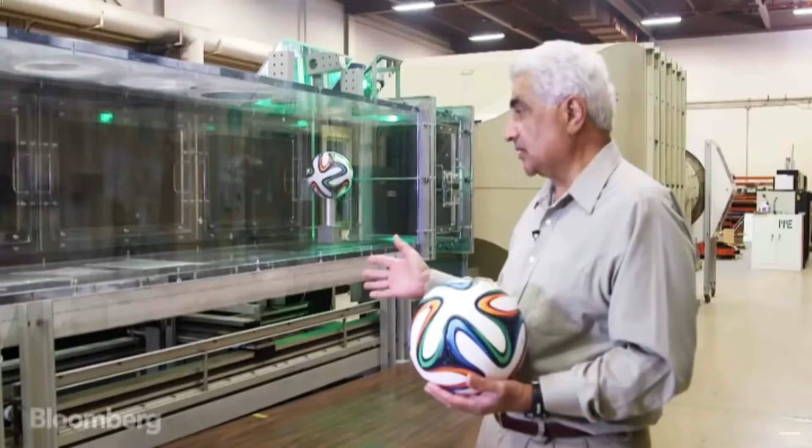Aerodynamics basically is the study of fluid flow around objects. NASA is not in the business of designing soccer balls or any balls for that matter, or testing them. What we do use sports balls here for, especially in our lab, is for educational purposes. We found that it's very easy to get young kids interested in our field by showing something they can relate to. What we have here is a wind tunnel, which is basically a chamber through which air flows.

When it comes to soccer balls, what we're looking at is the flight of the ball through the air. There's a very thin film or layer that forms near the ball surface, and it's the behavior of that layer, which we call a boundary layer, which is critical to the performance of the ball.

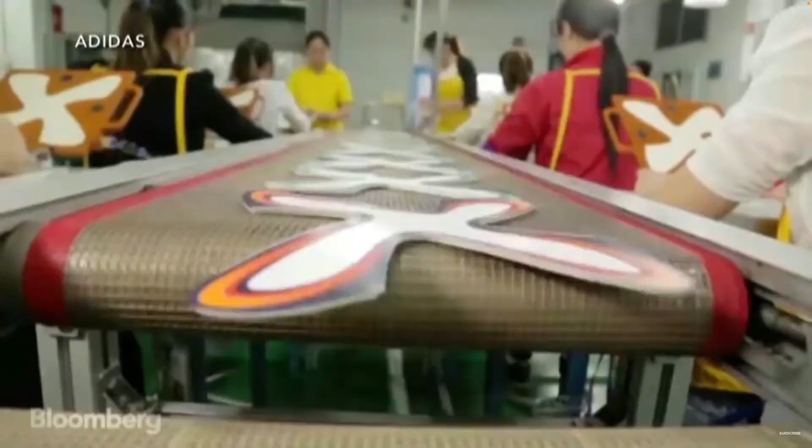As far as the aerodynamics go, it's the structure of the outside, the material, the roughness. That's what determines the aerodynamics of the ball.

Knuckling is when the ball flies erratically through the air, or it may change directions as it's flying through the air. What's been done to this ball is that by using these panels with fingers on them, the seam length has been increased compared to the ball from 2010.

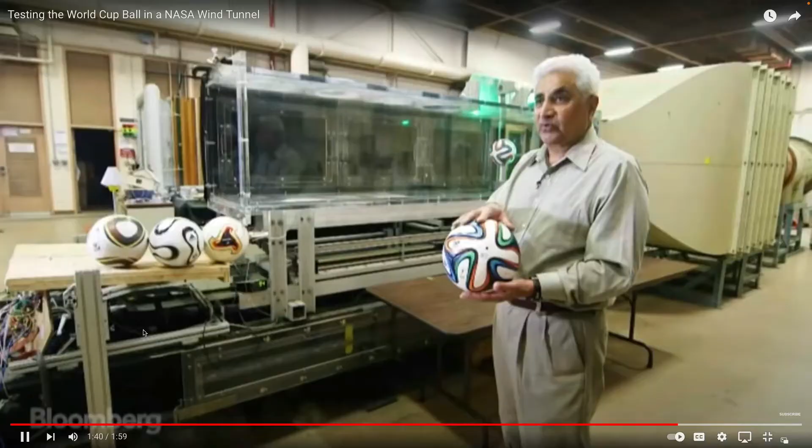What we're looking at with the smoke patterns is where that smoke leaves the ball, at what point along the surface. When that position of separation changes suddenly, that's the speed at which the ball will knuckle the most. I think the basic message for the players is that you'll see less of this knuckling.

So I guess, yeah, we're talking about dimensional analysis, and it's a technique that we can use that helps us guide experiments that we might want to run. And so these three things that we looked at, we can go back since we have some time.

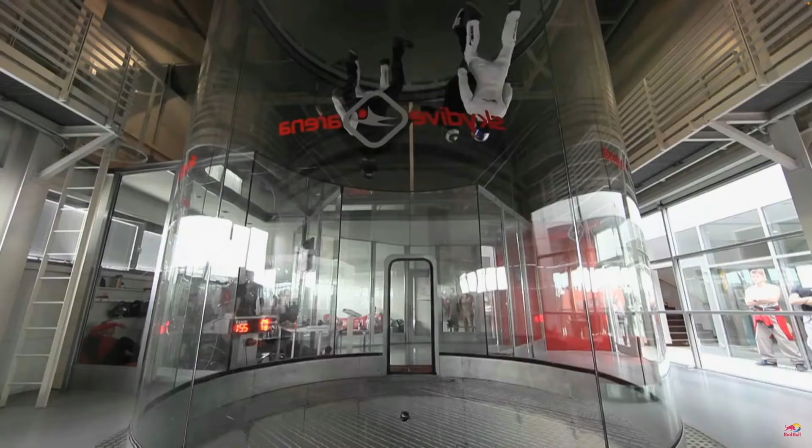We got the Red Bull acrobatics team flying vertically in the vertical wind tunnel. I guess just as I presume they could use it for training people to go do skydiving. I imagine that's what perhaps it's for, but obviously in this case it's for recreation as well. And you get the idea. You can almost do synchronized swimming, right? It's almost synchronized air tunnel work in terms of being able to move around these.

Quite elegant in some respects, but that's just using one of the tools we might talk about in terms of what we're interested in, and that is a wind tunnel, which is just a way to get fluid, air in this particular case, moving at some reasonable velocity.

The second one was the car, looking at getting a car running within a wind tunnel. Wind tunnels are big enough that you can get a full-size prototype in there, so you don't have to worry about it being a model and having to scale based on that. But you can use the same principles we advanced last time.

There are two important numbers that we have to look at. One is the Reynolds number, to make sure it's kinematically the right flow regime. And at that given Reynolds number, for a car, that would be for the air velocity going at 100 miles an hour, or whatever it is you want to judge the performance at.

Then using measurements of lift and drag on the weight of the car, and horizontal translation, which I presume is this little doodad here measuring lateral translation and horizontal force, you can scale that to look at the magnitudes of lift and drag. In fact, you wouldn't need to scale it in this case, because you're using a one-to-one model with the same velocities for the flow regimes.

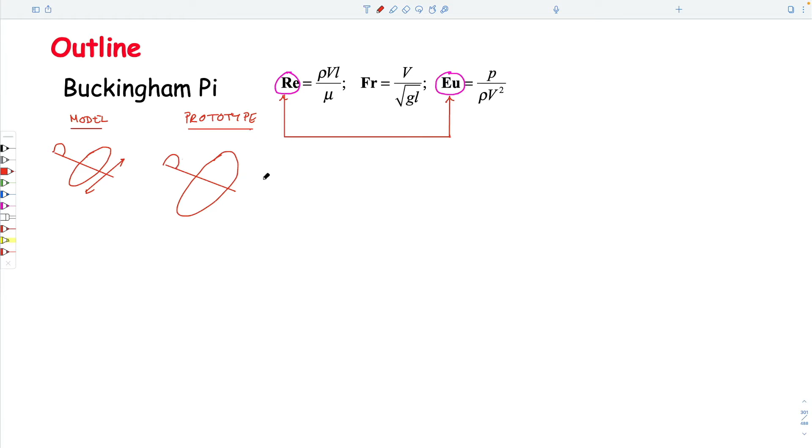But they should be similar in proportions. So we could write the length of the model and the length of the prototype of the wingspan, the width of the prototype and the width of the wing airfoil, since that would be an important dimension for us, of the model. We could perhaps have a pressure on the model and the pressure on the prototype, and I don't know what else we want to consider.

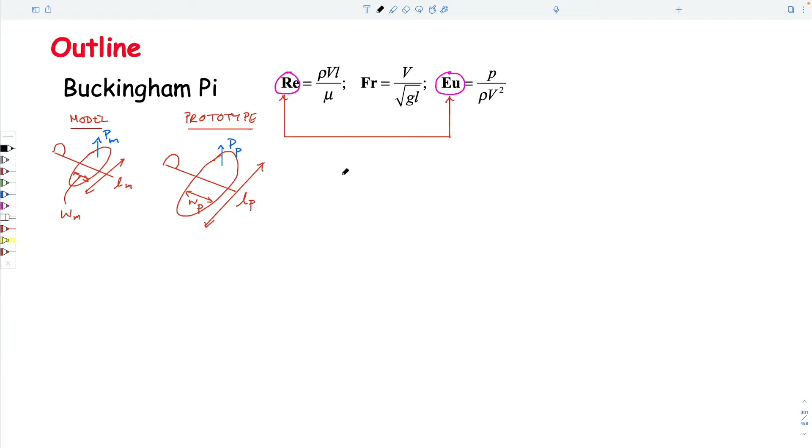We said there are three requirements for similitude. Let's take this as equal to 1 meter, and let's take this as equal to 10 meters. So the first one was geometric similitude.

We said that the ratio of the lengths should be constant, so Lm over Lp equals a constant for all the components. In this case, Lm over Wm equals L of the prototype over the width of the prototype - the ratios. So if this is 1 meter and this is 0.2 meters, then this would be equal to 2 meters. It just has to look physically the same, geometrically a scale model of what you're dealing with.

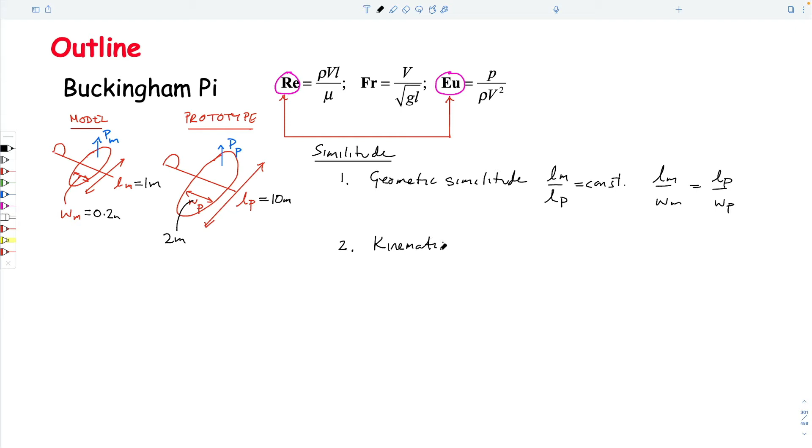The second one was kinematic similitude. We explained that the flow regime around it, if you took a snapshot, should look the same for the model and the prototype. So this separation - imagine this is a soccer ball, and this is the separation on the backside that comes out of the cross-sectional area of the soccer ball. We want to make sure that the flow regime is the same.

We make sure the flow regime is the same by making sure the Reynolds numbers are the same, so the Reynolds number for the model equals the Reynolds number for the prototype. The Reynolds number is inertia to viscous forces. We didn't define it here, but we have a velocity in the model - what am I going to choose for velocity in the model? 100 meters a second. And choose a velocity in the prototype.

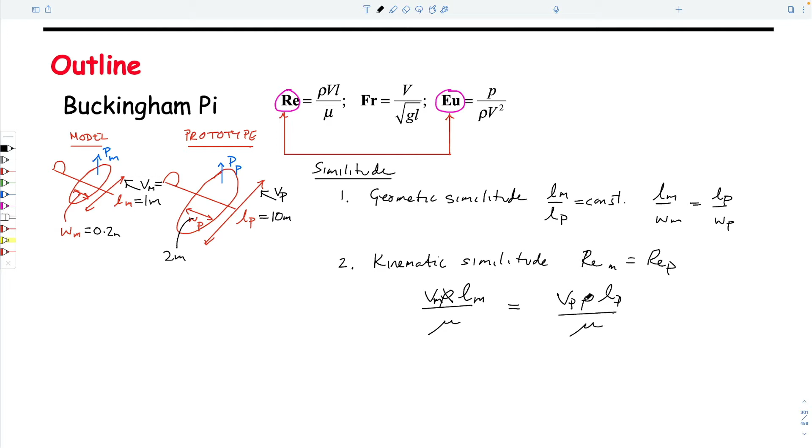So velocity times density times length divided by viscosity, for the model, equals the velocity of the prototype, the density of the fluid in the prototype, the length of the prototype divided by the viscosity of the prototype. If you're using a wind tunnel for both, then by definition the densities of the fluids will be the same, and the viscosities of the fluids will be the same.

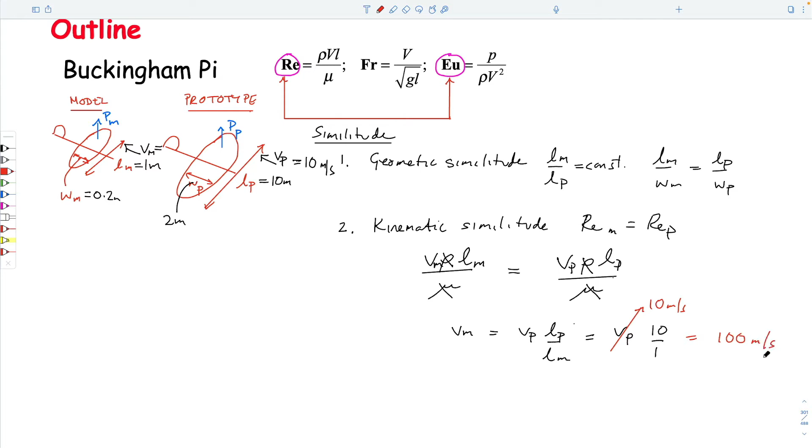So from this, the velocity in the model is going to equal the velocity in the full-scale prototype times the ratio of the lengths - so this would be 10 over 1. If we have a velocity of the prototype of 10 meters a second... let me use some different colors... then the velocity in the model has to be 100 meters a second to maintain the same flow regime.

The third one was dynamic similitude, which is that the Euler number for the model and the Euler number for the prototype have to be the same. The Euler number is a pressure ratio - the ratio of pressure to inertial forces: pressure over rho v squared equals pressure over rho v squared. This is the pressure in the model, this is the velocity in the model, and prototype and prototype.

If again we choose the same fluid flowing past it for the two, then what we want out of this is the pressure in the prototype. The pressure in the prototype is equal to the pressure in the model multiplied by velocity of the prototype squared over the velocity of the model squared.

This is what we'd measure. And the velocity of the prototype, what did we say? To maintain kinematic similitude, we said VP was 10 meters per second. So this is 10 squared over 100 squared. The pressure in the prototype is going to equal what we measure in the model test multiplied by 10 to the minus 2, which gives a pressure.

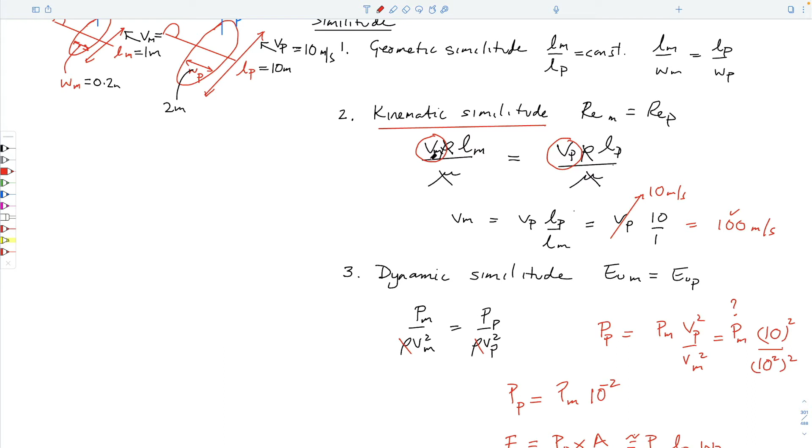If the Reynolds numbers are the same, then the velocity we're traveling at in our plane is replicated in the wind tunnel by choosing the model velocity to be equivalent, matching the Reynolds numbers. If we use that Reynolds number in the lab, we use it to convert and get the ratio of the pressures in the system. So if we measure on the model, we wouldn't measure pressure, we'd measure a force, typically an uplift force, and then use that to calculate what the uplift force would be on the full scale thing. That's really all it is.

So what we're doing is having a Reynolds number, measuring an Euler number, and getting some relationship that matches them. We know that if we use the correct Reynolds number, we can calculate the appropriate pressure Euler number that represents the pressure. So if we do both the model and the prototype at the same Reynolds number, we're guaranteed that the Euler number would be equivalent, but the relative dimensions of the system would be different. That's really all we're attempting to do. So that's kind of what we're doing in this week 9 material.

There are 3 requirements we have to match. Scale models should geometrically look similar to the system by being scaled down in every dimension, or if it's 1-to-1 scale, it doesn't matter. If we make sure the flow regime around it is the same in both model and prototype, we can define the appropriate velocity to do the model experiment at. If we do the model experiment at that velocity, we can measure the pressure in the model, and then convert that into the real pressure on the prototype. So that's where we're going with this.

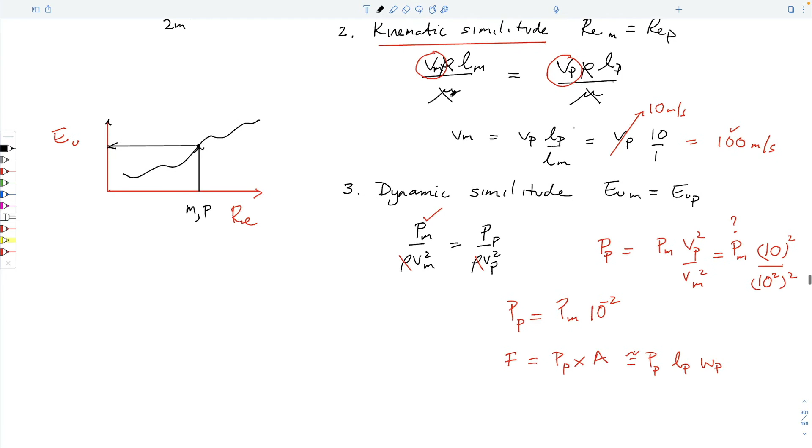So we made this supposition that we can link these two important variables. There's a third one — we said this is for free surface flows, so we're not so interested in that for what we'll do. These are for pipe flows that we'll deal with.

So what we could do is go back and look at some things we've already talked about — flows around objects, and we'll come back to this diagram, but looking a little different. We'd like to walk before we can run, so we could try looking at flows on structures that are perhaps more useful or more germane to us.

So we talked about pipe flow, and about changes in pressure that drive flow. We've talked about lengths, which I'll call L. We'll talk about the velocity we get out of this, which we can call V or V bar. What else? We can define the geometry of this, which is a diameter. And I suppose we could define some other terms: the density of the fluid, the viscosity of the fluid. And we've already defined the diameter — these are the parameters.

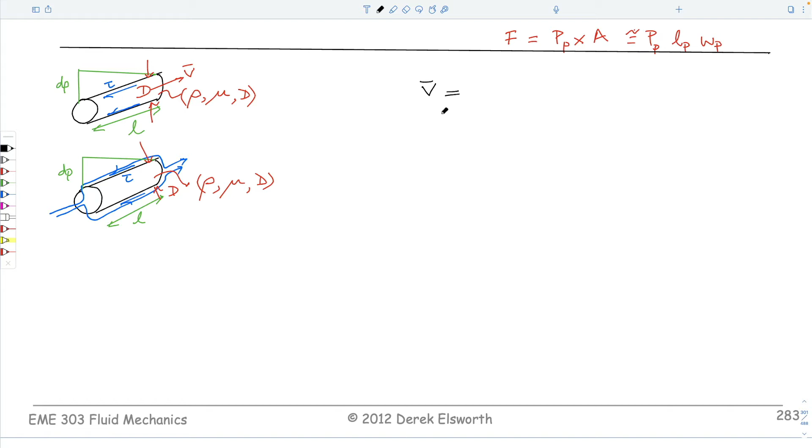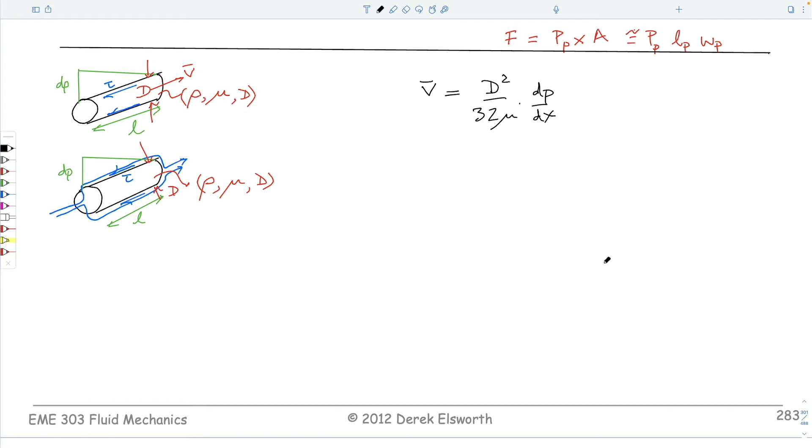The reason for looking at this is that if you remember from 8.3, our last period together on Friday, we came up with an expression which was this. I'll go back to it in a second. So write that, try to remember it. We'll come back to it, and I'll just switch back to 8.3.

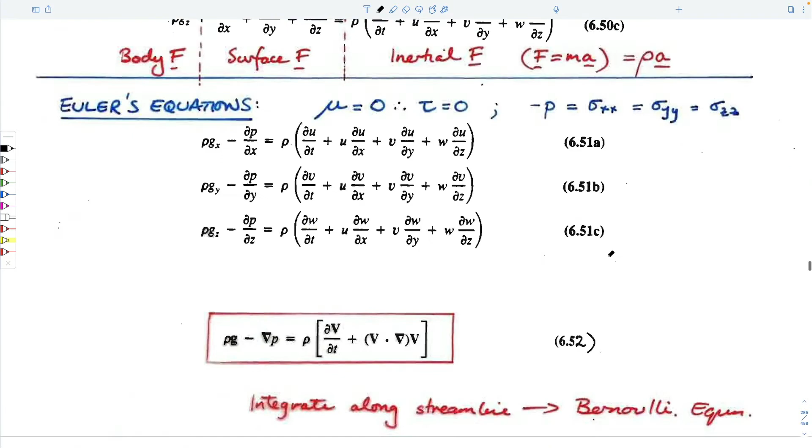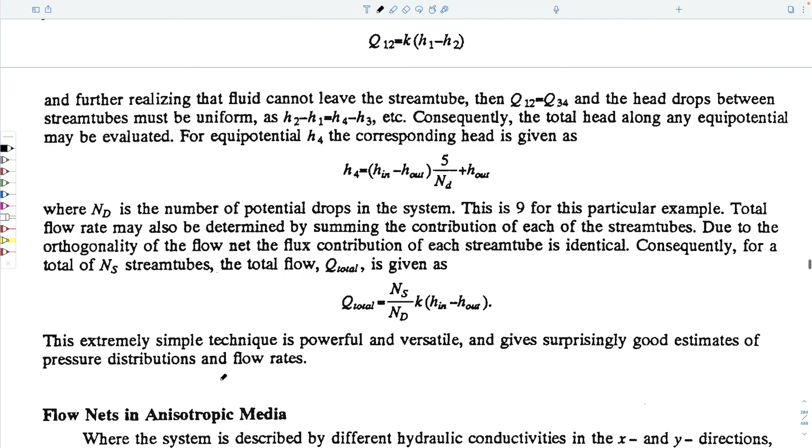If you remember what we talked about, these Navier-Stokes equations and how we could solve these three equations and continuity equation for some very simple geometries. The very simple geometries we talked about were flow through a parallel-sided duct, like this, or flow along a tube. And if we had flow along a tube, we had this expression that comes out from basically throwing almost all the terms of those four equations away and just dealing with the ones we needed to. We ended up with a very simple expression for laminar flow.

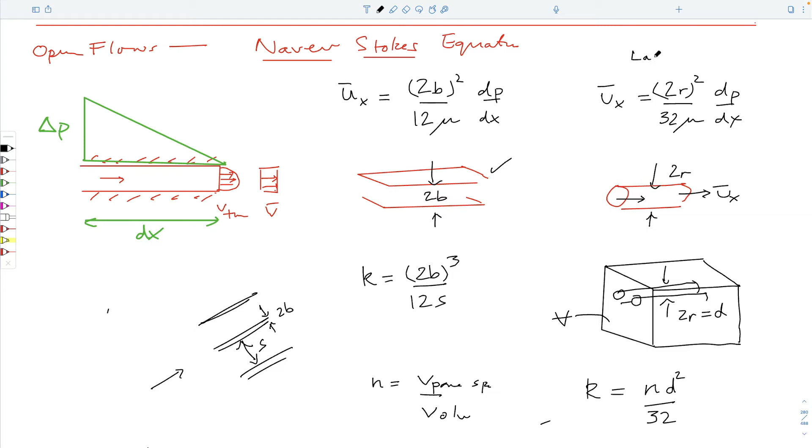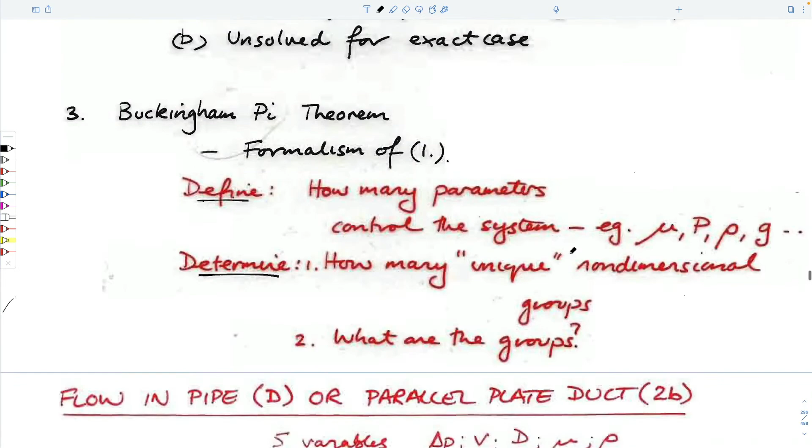So all I'm doing is repeating this, where 2 times the radius is the diameter that we dealt with before. Wish I could zoom straight through to the same location. Don't want to be scribbling on this. Am I already past it? No, that's the last one. You can cut this out. So this is the expression here.

What we could do with this is write it out - well, I guess I don't have to write it out, I could do something to it. What do I want to do? I want to multiply by velocity. So this is the average velocity coming out here. I want to multiply by density on both sides. And I want to divide through both sides by dp.

So now if I get rid of some terms - let's use something colorful - pressure, I get rid of. I could gather some terms. So immediately you see that this value on the left-hand side is 1 over an Euler number. An Euler number is pressure divided by density times velocity squared. So pressure divided by density velocity squared is 1 over this.

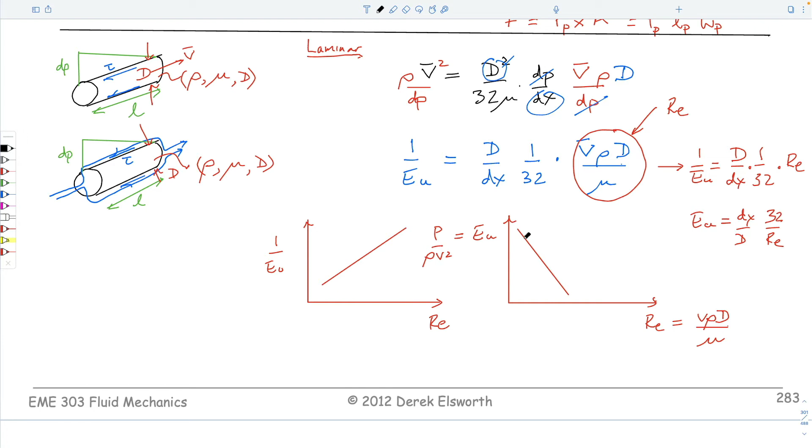And if we do that, this equation should look like this, the opposite gradient from this. And it's useful for us to do that. It turns out that this Euler number can also be written as something called friction factor, a squiggly f, which says something about the resistance to flow along a pipe.

In fact, we'll discover that the head loss in our Bernoulli equation is equal to the length over diameter ratio of our pipe multiplied by a friction factor times v squared over 2g. Dynamic velocity change, a drag coefficient you can think of, and how long the pipe is relative to its diameter. So what we'll develop is some charts that look exactly like this.

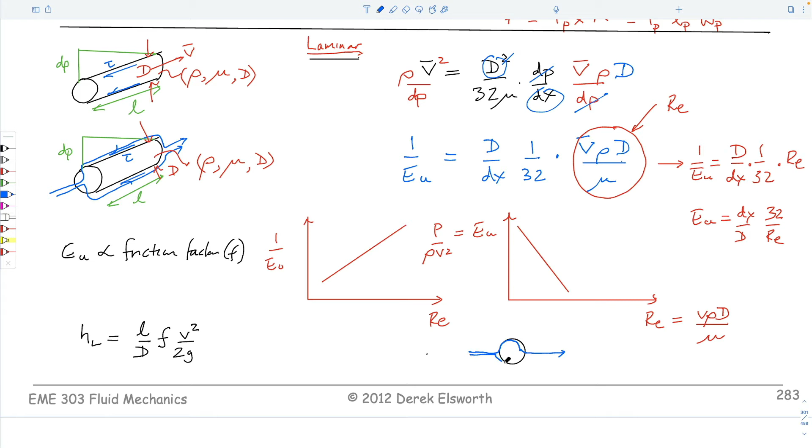We said already that this is for laminar flow. So if we think of it not as flow within a pipe, which is not so easy to understand, but as flow around a sphere, laminar flow would be happily along here, hugging the contour and separating off the back, just hugging the contour. This would be a magnitude of a Reynolds number of about 2,000.

And as we go beyond this number here, we find out that it becomes horizontal. We'll find out that there are a whole series of lines, and these lines, probably not information we need right now, are proportional to epsilon over d.

So if you think of your tube as being a tube that looks like this, of some diameter, then epsilon is just the roughness of the wall, the amplitude. So if you do top and bottom, this height here is epsilon. As you change the roughness of the wall, you get different numbers. It doesn't really matter what the roughness of the wall is if it's laminar, but as you go into the second regime above a Reynolds number of 2000, then this is turbulent.

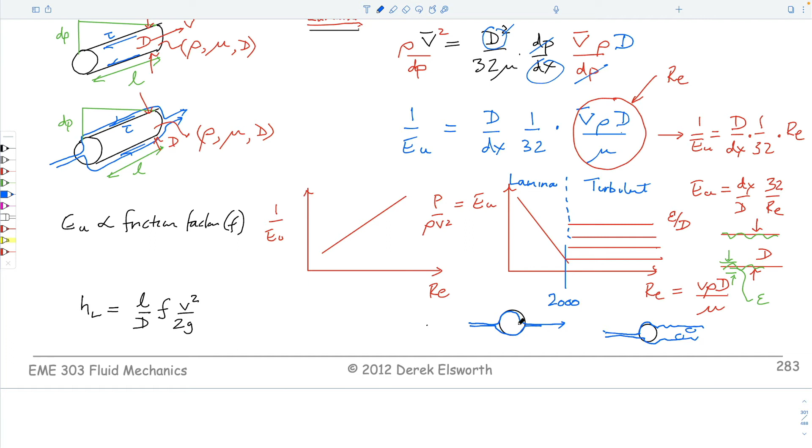At a low Reynolds number, you get these creeping flows, and it turns out that the frictional losses are proportional to the viscosity, because it's this drag on the cylinder that is causing this. As we get to be turbulent, the frictional losses are proportional to density of the fluid and the velocity, v squared over 2g.

You can imagine that when we did the San Francisco International 747 versus the truck, the whole idea was that fluid comes out at some velocity, it stagnates on the truck, it transfers the velocity from the jet engine into a pressure on the truck by stagnation, and this is what pushes it over. So this is in a turbulent regime where we can make that change. In this particular case, the transfer of flow velocity onto this is merely by the drag, by the shear force on the sides.

This is because it's hitting it face on, and it gets it in the chest, and it's pushing it backwards. This is because all the air is flowing around it and pulling it by the drag that the viscosity acts on it. So perhaps we don't have to understand anything more than that.

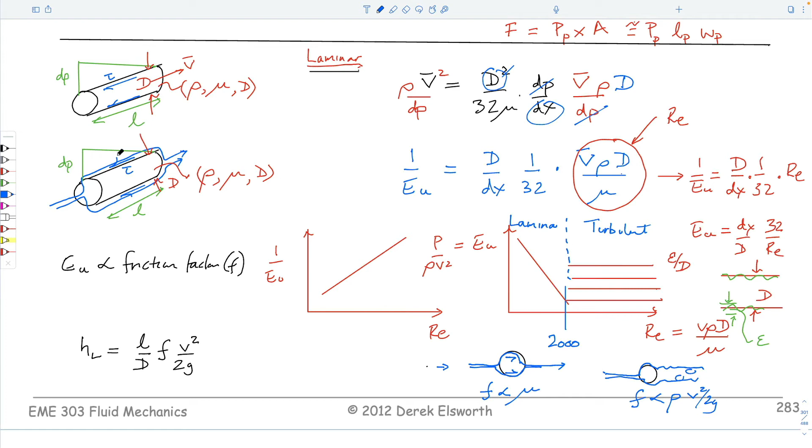But the reason for introducing this here and in this kind of vein is that we'll understand this, and perhaps it's worthwhile drawing. We're almost out of week 9. In week 10, we'll talk about pipe flow, and this is in weeks 10 and 11. That's exactly what we're doing. We're talking about a friction factor, and we're looking at flow along a tube. I guess we've kind of done a couple of these, but never hurts to reinforce these ideas.

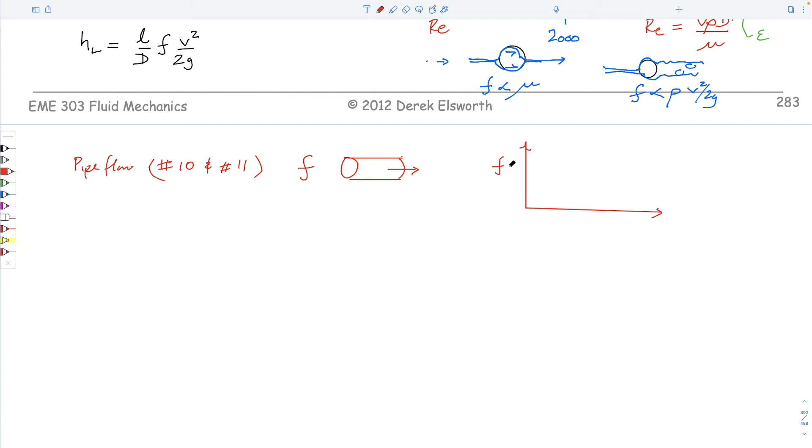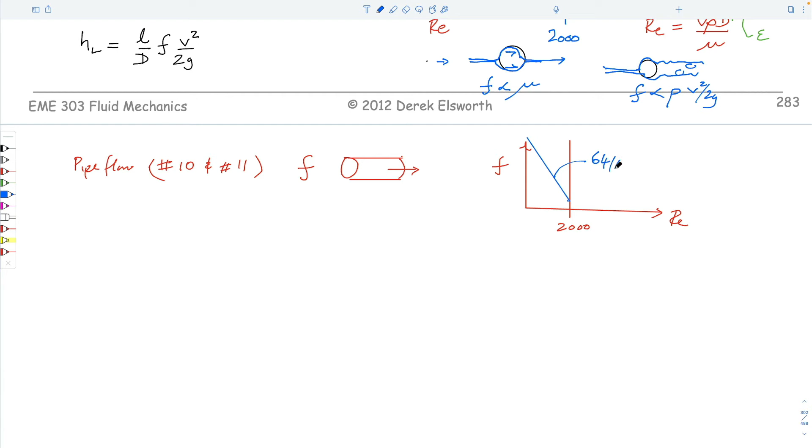And we end up with a figure which gives us a friction factor as a function of Reynolds number. We know what those terms are. We know that this is a number that's about 2000. We know that this value for laminar flow, for flow in a pipe, is equal to 64 over Reynolds number. We kind of know some of that here, right? We have 32 over Reynolds number. It's a factor of 2 out, probably because we define friction factor a little bit differently as 2 times Euler number, maybe. I can't remember.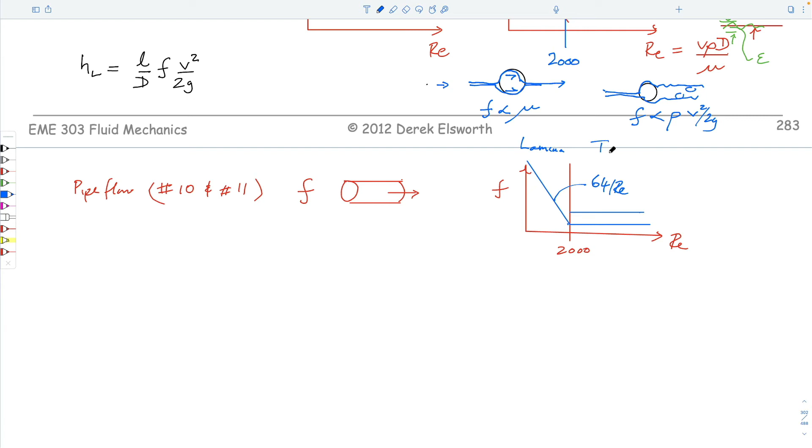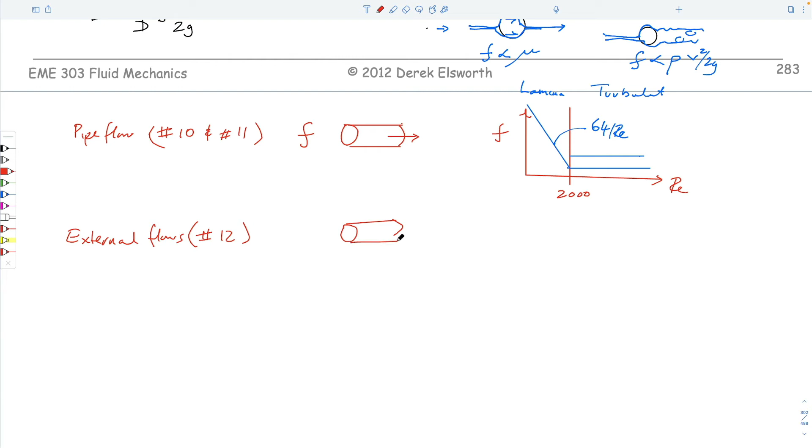And so this is exactly the system we get for that, between laminar and turbulent. If we look, as we will do, at what we'll call external flows, flows around wind turbine blades and flows around airfoils, then we have exactly the other figure that we kind of drew, and that is that flow goes around it.

So I suppose for this one, what did we say? That the head loss is equal to length over diameter times friction coefficient times v squared over 2g. So this would be the average flow, and this is the length of pipe. This is the term that goes into the Bernoulli equation.

For external flows, we'll have a coefficient of drag, which is equal to — I'm sorry to use the same symbol, but if you imagine a force acting backwards, a curly D, drag force, over half rho v squared times A.

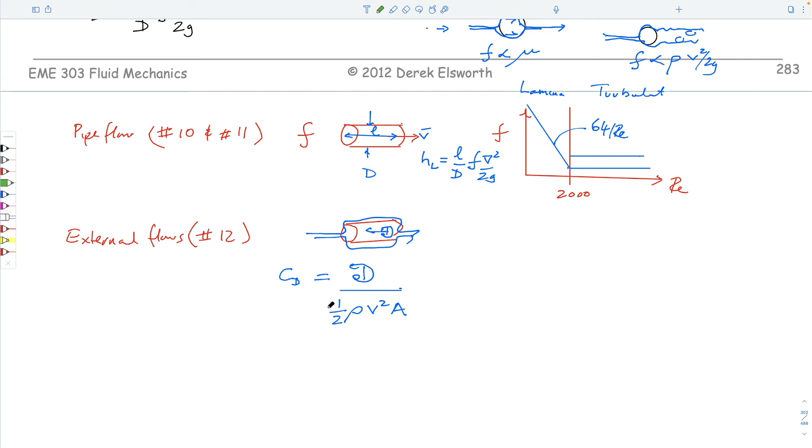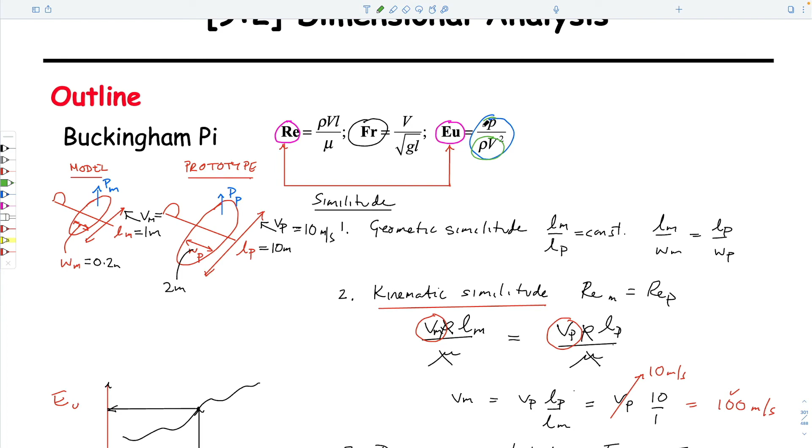Remember from this, half rho v squared is part of our Euler term. So you could think of this being equal to a pressure, and a pressure times an area gives you a force. So the area here would be the cross-sectional area of this system.

And no great surprise, we could draw a graph which looks like this: Reynolds number, coefficient of drag, this term here. You'll see why we do this later. Again, laminar and turbulent — I can't remember exactly what this breakpoint is, it's of the order of 2000, something like this.

This allows us to calculate the drag force on something, or it could also be a coefficient of lift. Coefficient of lift is equal to curly L divided by half density of the fluid, times the far field velocity of the fluid squared, times A. So this could also be coefficient of lift.

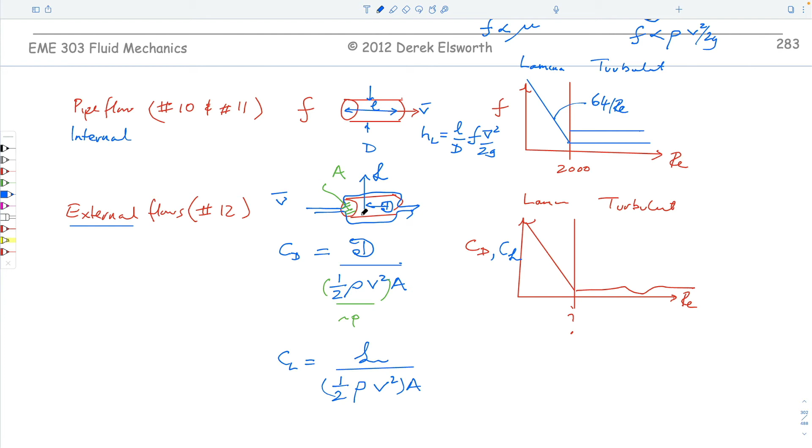Same idea — all I'm trying to make the point is that these curves look the same. This happens to be an internal flow, this happens to be an external flow, but it's really the same process. Here, there's a force exerted on the side of the pipe on the fluid, and we're interested in that force because that slows it down — that's what head loss is. Here, there's an external force on the body that we're interested in for its own magnitude, not its influence on the fluid, but whether it gives drag for the car, pulling it down the road, or whether it gives lift or pushes down the car.

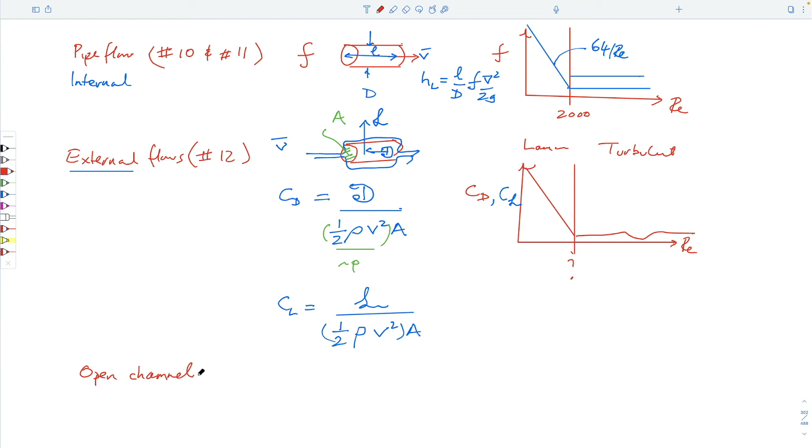And I guess just to close off the three sequences, we'll also talk about open channel flows, and that would be in week 13.

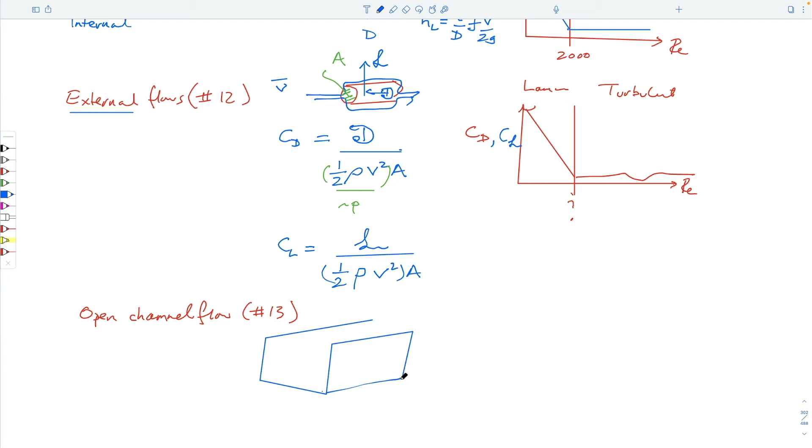The idea is that we can have something that looks like this — you get the picture. This is flowing again at some average velocity, and we would have a characteristic dimension — actually, two characteristic dimensions. There's a height of flow and a width of flow, but let's not worry too much about that. I guess this would be D. And we'd have another curve which would look like this.

It would be Reynolds number, and what we call N — N equals a Manning coefficient, named after someone. Again we have this transition from laminar to turbulent, and again we'd have a figure that looks a bit like this, with a whole bunch of these.

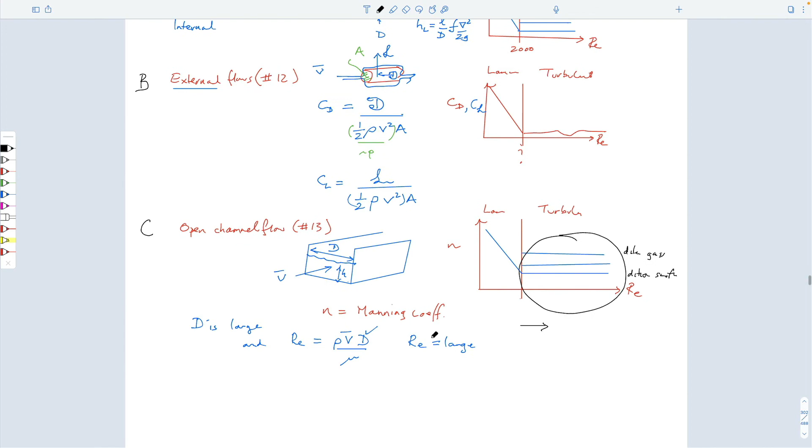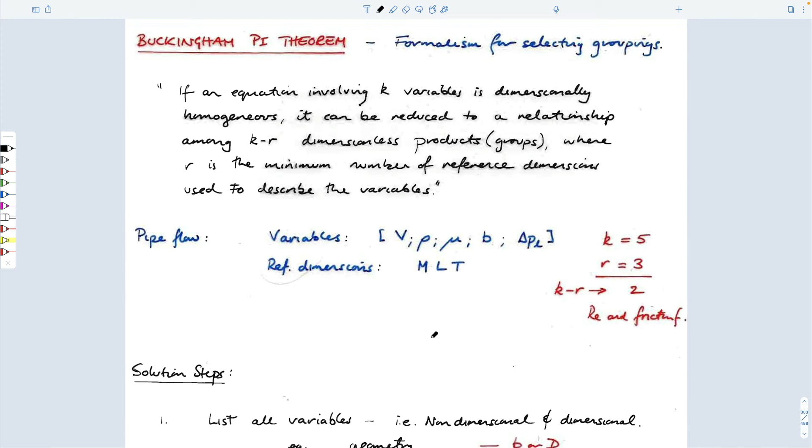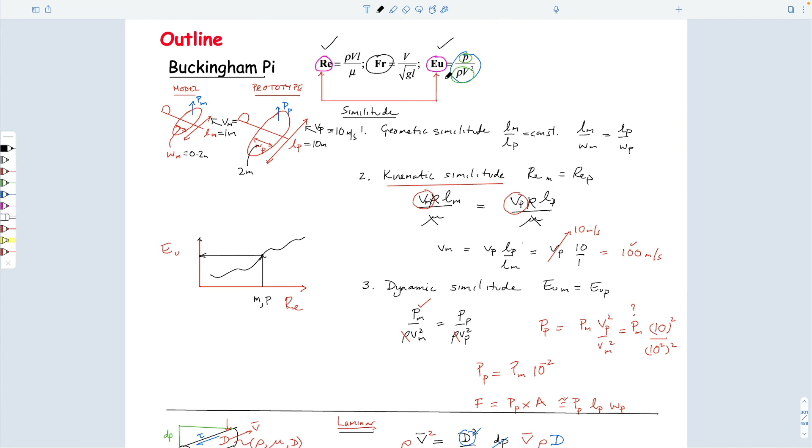So we started out by saying that dimensional analysis is kind of a misnomer because really we work in non-dimensional numbers - the Reynolds number that indexes flow, and the Euler number which indexes the forces on a body. We also said we have this fancy theorem called Buckingham Pi, named after Mr. Buckingham, who was a fluid mechanicist. Buckingham Pi is a formal method to define exactly what parameters control your particular system, and to decide whether these are really the parameters we need, or whether there are others we need to worry about.

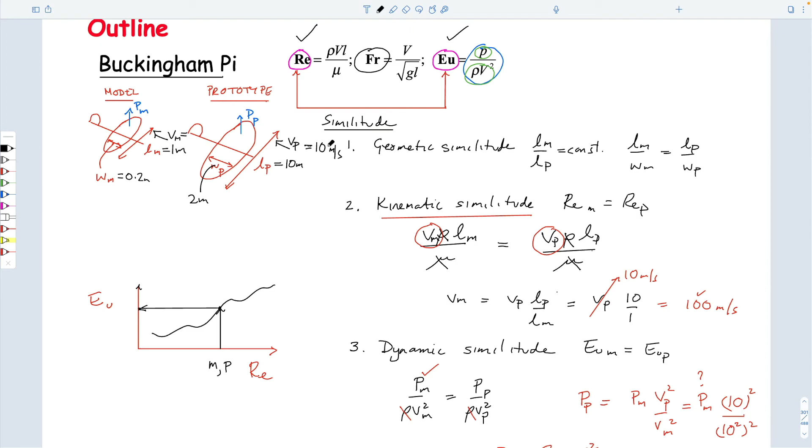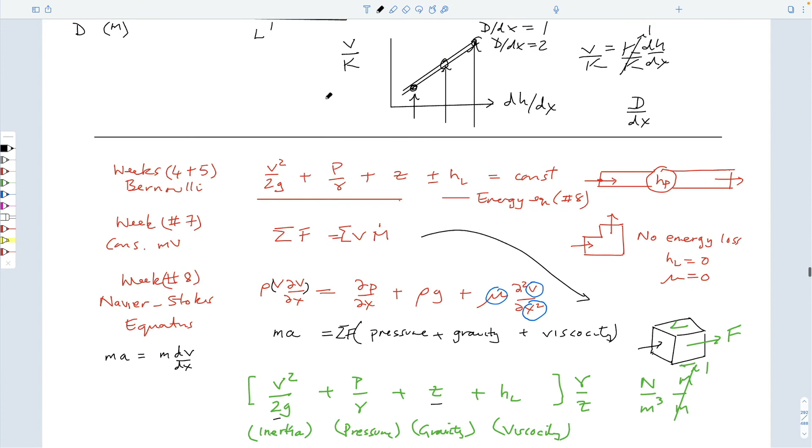We alluded to this before - remember when we started last time, I made the case that we looked at something called Darcy's law. We could define the individual parameters which control flow within a sand pack, and do something with those variables to come up with a formal way to divide them into non-dimensional variables. With 4 different variables represented by 2 different conditions - mass, length, and time - none of these relate to mass, but they do relate to length and time. So 4 variables minus 2 coefficients gives us 2 potential non-dimensional variables.

If we want to group these, we could do it just by inspection. The only way to group these together in a minimum set is to link the two that have velocities together, by dividing one by another - velocity over hydraulic conductivity - and by linking the head drop along the length of flow, dividing those by each other. We end up with 2 parameters, and we could link those in the same way as we've just done. We said we could use Reynolds number and Euler number to develop a relationship so we could move between different scales, do things on a model, and then define behavior at a larger scale.

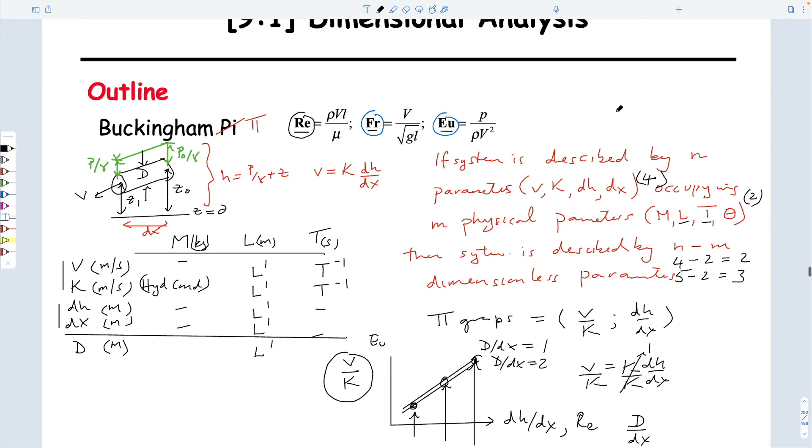So we can use this same formalism we kind of jumped into last time in a more sophisticated way, as in the Buckingham Pi Theorem. You'll see it here - all I'm going to do is try to explain it, and you can read it just as easily as I can say it.

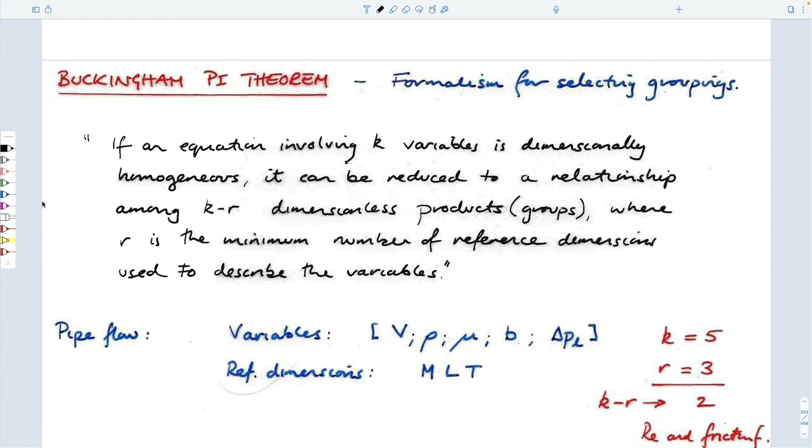So it says, if an equation involving K variables - length of the pipe, diameter of the pipe, this would be length, this would be diameter, this would be viscosity, this would be density, and so on - if it can be reduced to one with R reference dimensions, where R would be mass, length, and time, could also be temperature - we said there was a 4th one but we won't use that here - then K minus R gives you the total number of non-dimensional parameters that will define your system.

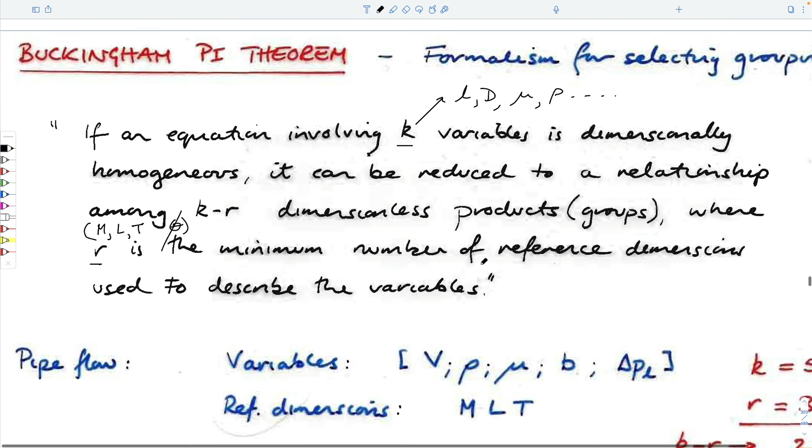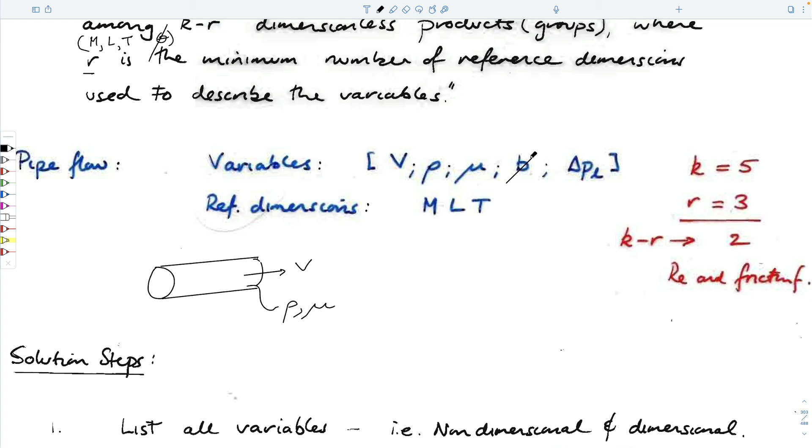So what we might do is try doing it for exactly the system we've looked at - for our pipe. So our pipe would have: velocity, density, viscosity, diameter - bad choice of label there - and this parameter here, delta PL, is dP over the length, so this would be a pressure drop.

And it would occur along some length, dl. So all we're doing here is combining these two together to get one parameter, which we think is appropriate. And so then we have 1, 2, 3, 4, 5 parameters.

Velocity is length over time. Mass, density is mass per unit length. So we have density is mass per unit volume, and velocity is length per unit time. So we have all of these three represented.

And so we think that for this system, we're going to have a total number of five minus 3 parameters, which is 2. Don't want to give the game away, but we could guess what those parameters might be. But let's see how we formally get those.

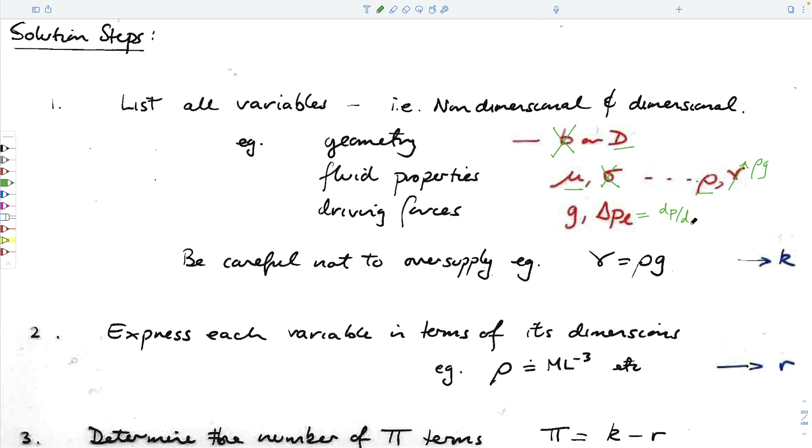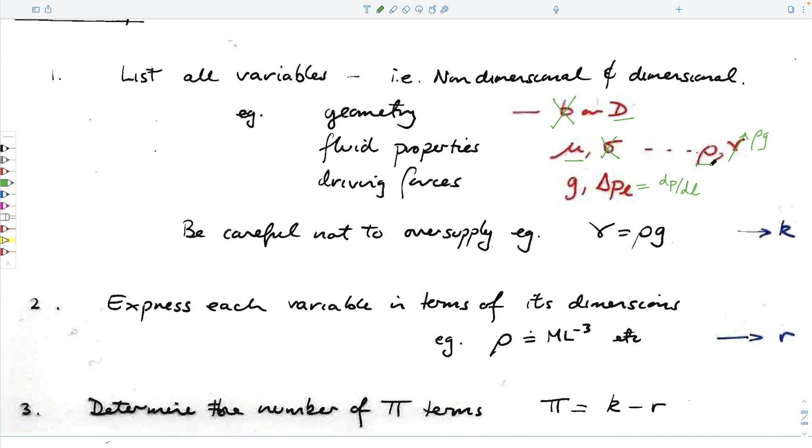If we define density, then we probably don't want to define unit weight because it's included in it. So we have to be a bit skillful about what we do. So ignore this number 1 because we're going to use these 5 terms that we have here. These will be our 5 terms. Don't care about this. Well, we do. We want to define each of the variables in the dimension.

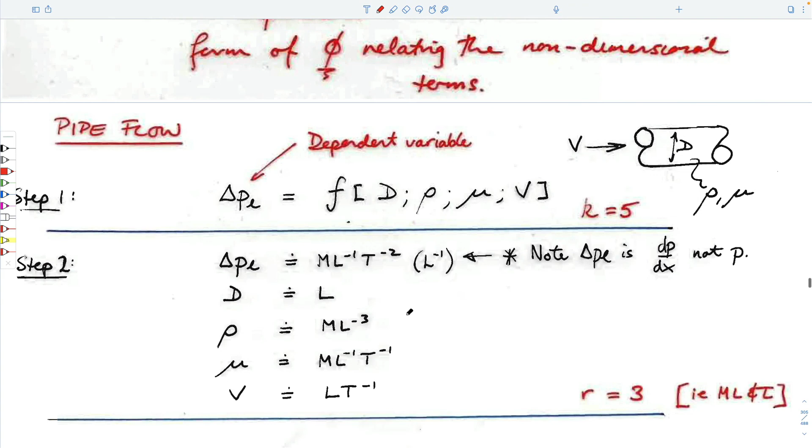So units of density are kilograms per meter cubed, which is mass per length cubed, which is ml minus 3, right? Probably not the best choice of color. And then I guess I don't think you need the wording for this. So this is the deal. So you have these in your notes.

So we're going to try and use Buckingham Pi to do this. We've got 1 minute to go, so I probably won't even start. We can do it more leisurely next time. All we'll do is define some parameters in this.

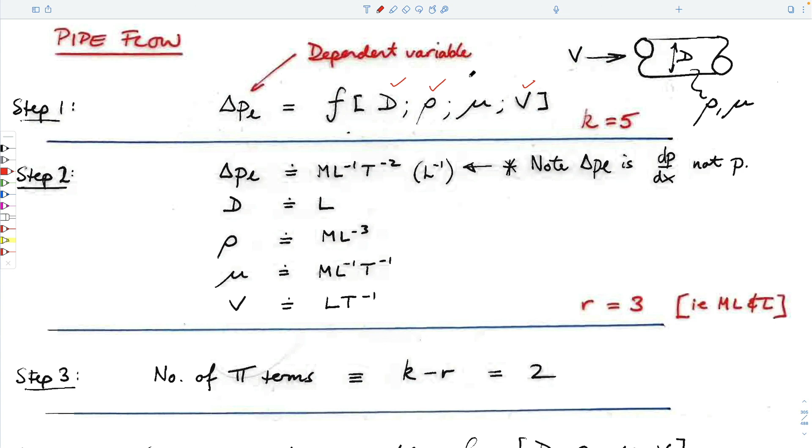We'll define some parameters that are repeating, and the repeating ones will be ones that mention length, mass, and time, so all of the dimensions are included. So if we choose diameter, velocity, and density, we take diameter, velocity, and density. And these will be our repeating variables.

And then we will choose first a non-repeating variable, which is pressure, and do something with it. And then we'll choose our second non-repeating variable, which is viscosity, and we'll do something with it. And for each of those steps of doing something with it, we'll come up with a non-dimensional term.

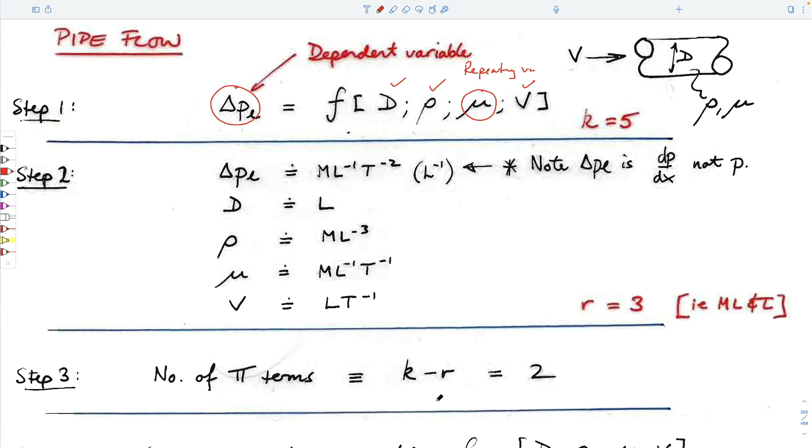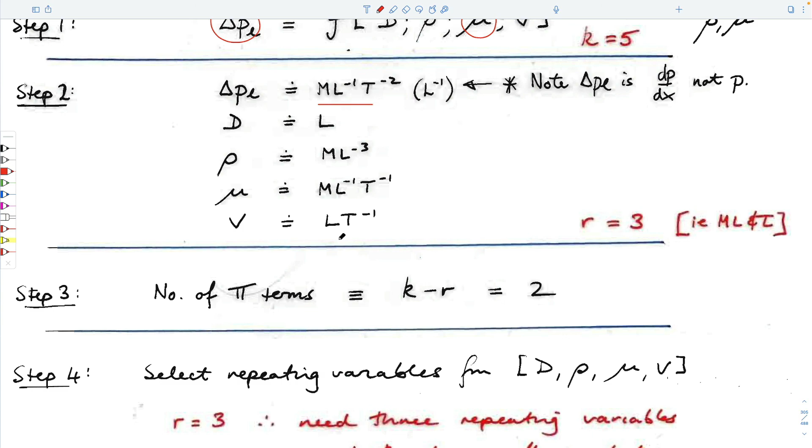And the whole idea is that we will classify each of these variables in terms of these basic units, mass, length, or time. And we'll combine them in some way by taking the repeating variables, multiplying it by each of the other dependent variables individually. So this is one independent variable, this is the other one.

And all we want is for this group to have no dimensions of mass, length, and time. So the exponents of these must be 0. And so if you think about defining the variables that represent pressure gradient, is this. The variable that represents diameter is just length to the power a, velocity to the power b, and density, mass over volume, to the power c.

We want to figure out what these exponents are, such that when we multiply this equation out, the units of this term have no units. And if by definition our choice of A, B, and C give us a term with no units, then this will be one of our dimensionless variables.

And my guess is that since this has pressure in it, this first one will probably be equivalent to an Euler number, which is pressure over rho v squared. I'm guessing. Yeah.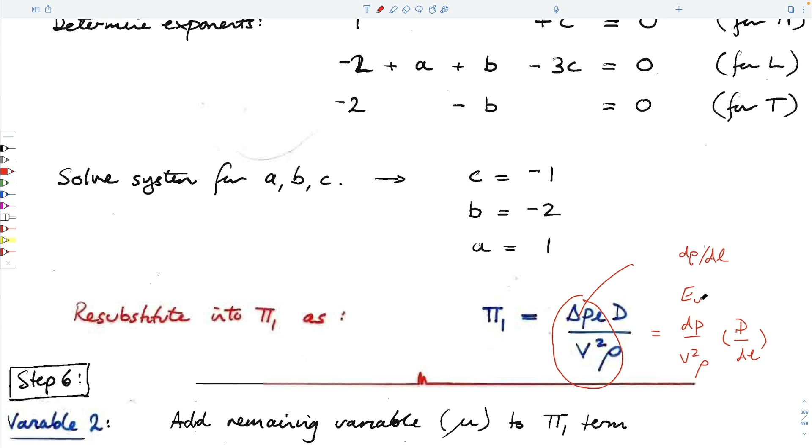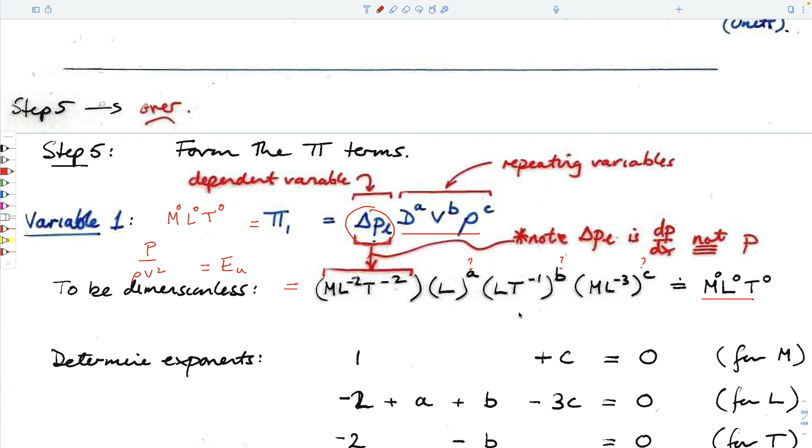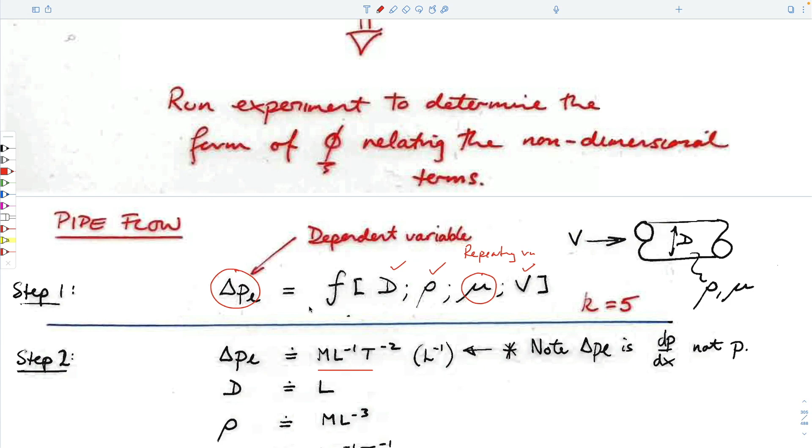So that's what we're going to do. So let's not spoil our fun for next time. We'll start from scratch. It's an incredibly important and powerful technique. It's always a question on the third test, and it's a recipe. Once you know how to do the recipe, you've got it. It's absolutely straightforward. But the idea is that we want a formal method of taking the parameters that describe our system and dividing them up into non-dimensional variables.

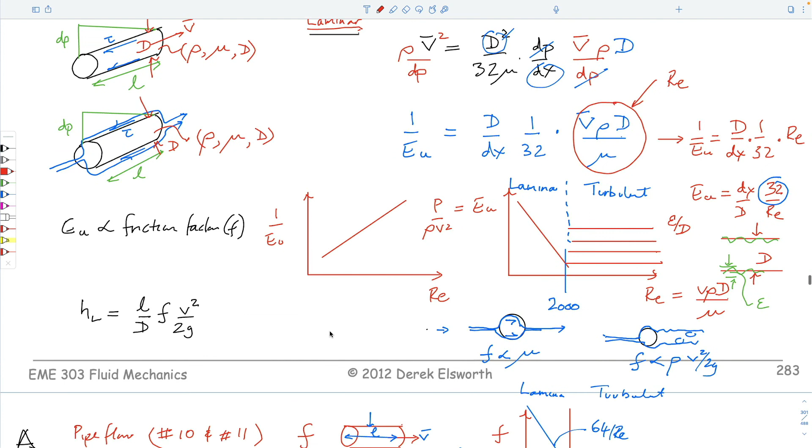And it's no surprise that the non-dimensional variables we'll get for this case of flow in a pipe will be exactly the same as those we've already said control the flow, because we've gone through it for this very simple case. But the closed form solution we've used to get the relationship between Euler number and Reynolds number for a pipe is only valid in this region. We don't know what it looks like over here at all. So to get this information, we have to do experiments where we increase the flow so it becomes turbulent in the pipe, and then get the right relationships experimentally to define exactly what these relationships are.

So we'll do that next time. Okay? Great. Questions?